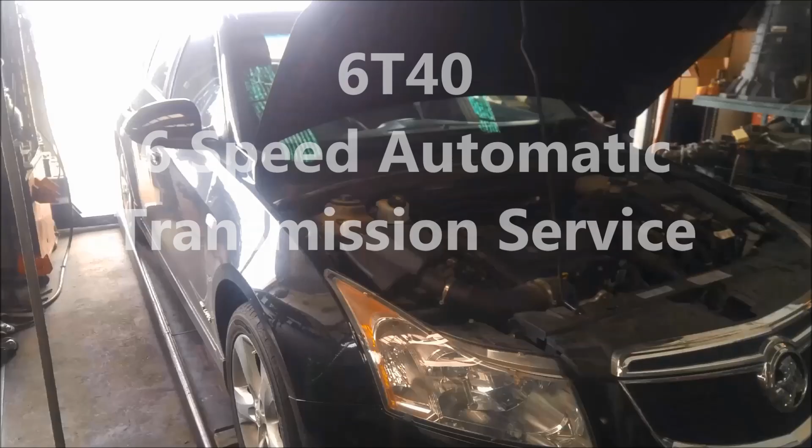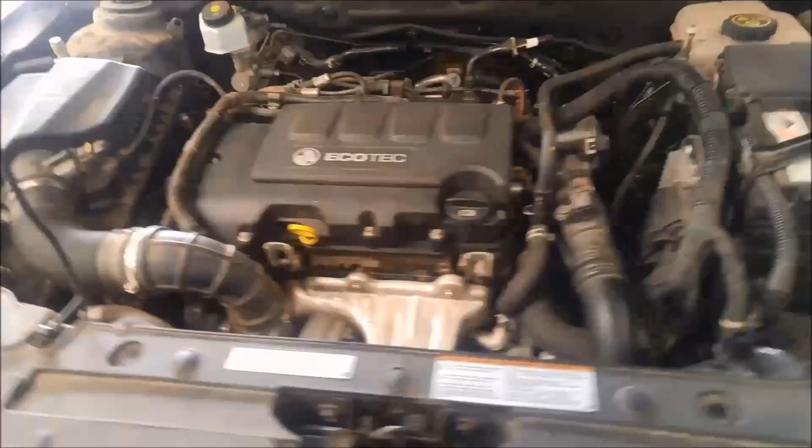G'day. Today we're doing a service on a Holden Cruze. It's the SRI, the 1.4 litre 6-speed auto, the 6T40.

Just to show you, filler plug. If you follow where this little breather is here, that's the breather for the transmission. There'll be a hose that runs down to a little plastic cap. That's where you actually fill the transmission. The oil level plug is just behind the left-hand axle there. I'll show you that in a moment. So I'll just give it a good blowout and clean around that filler plug.

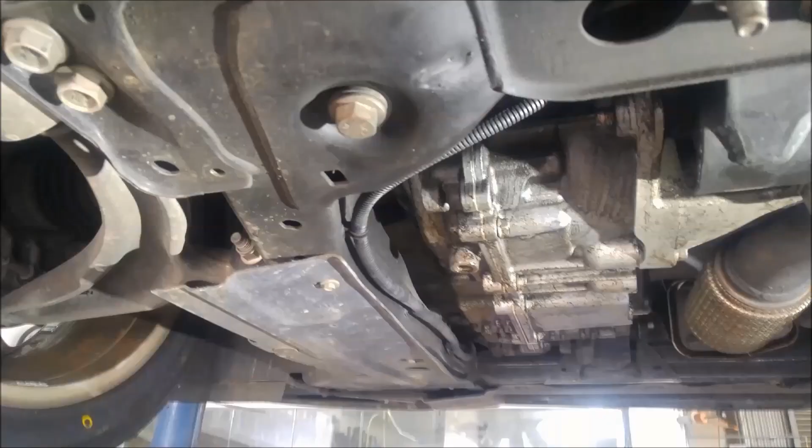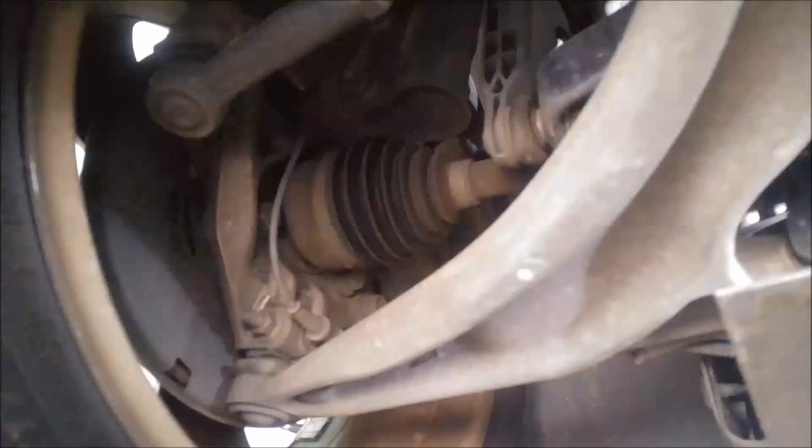Now, he's mentioned it's got hard downshifting, especially going around the corner. With these, there's a drain plug here. Good idea to always check the basics, like the CV joints, make sure they're not sloppy. Your engine mounts, because that can affect the harshness of going from drive to reverse as well.

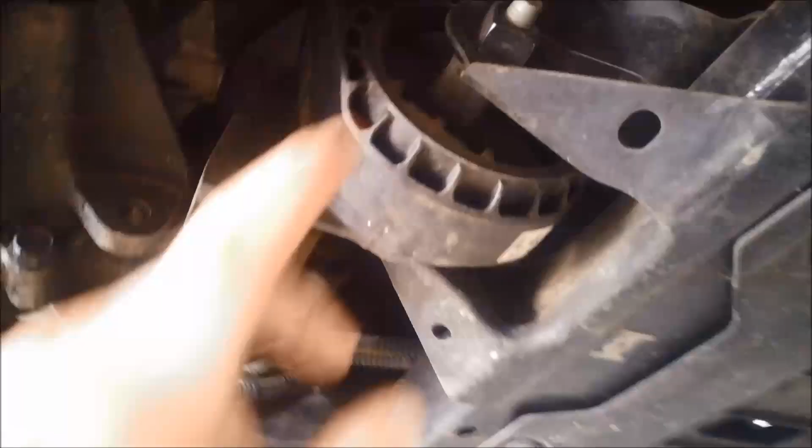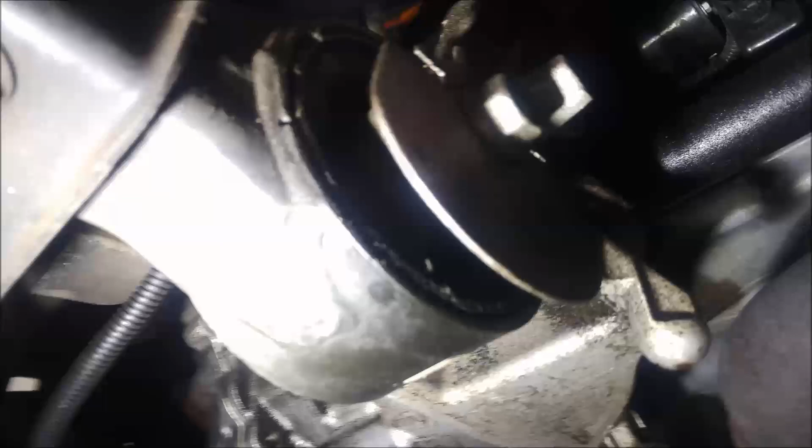So over here at the front, there's one that stops it from moving that way, and there's one at the back here as well. So quite often you'll see if they're perished, the rubber perishes if you've got an oil leak as well. That one looks alright, seems fairly central, same as the front one. And there's quite a few oil leaks all over the place. Seems to be leaking up higher there somewhere than that axle.

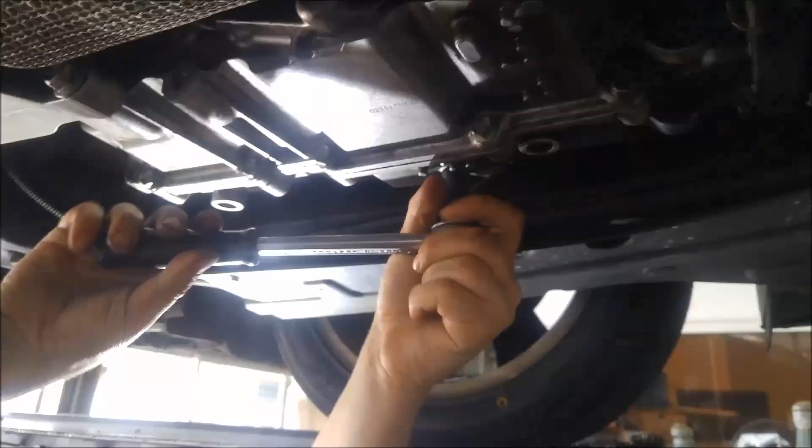I'll just give these a bit of a nip up. Sometimes that might take up a bit of that leak. They will loosen sometimes. And well, while it's in the vehicle, it's hard to get to them all. So I'll just give this a bit of a clean now and drop the oil out of it. Drain plug. Oh, it's pretty dirty.

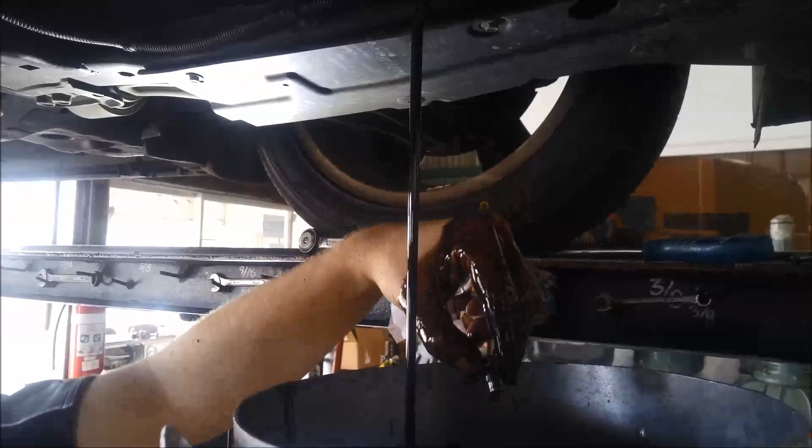That's drained out nicely. You can see probably about 3.5 litres have come out of it. So I'm just going to undo this plug here and just blow some air through that when this stops draining, and that'll force a little bit more of that dirty oil out.

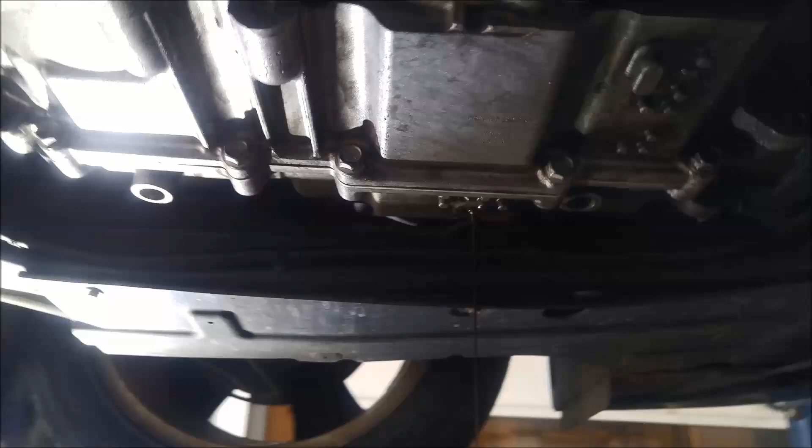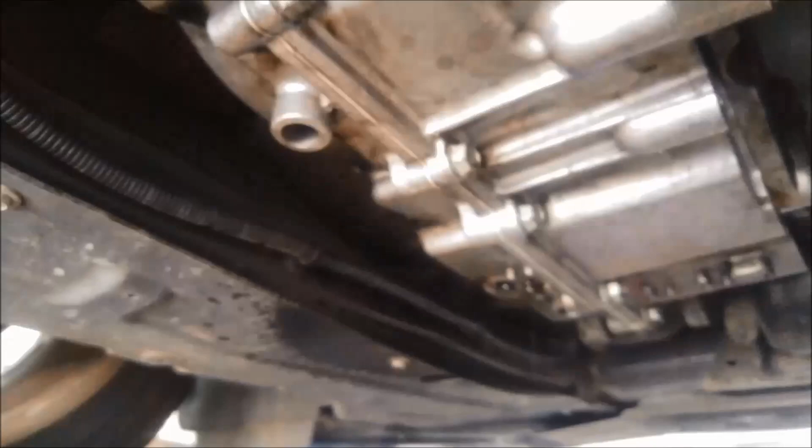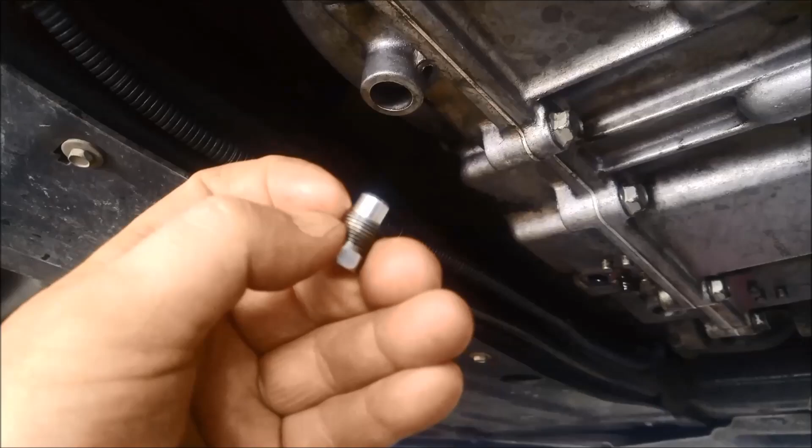Transmissions, they have an internal filter. You've got to pull the transmission apart to replace the filter. Some people put an inline filter on the cooling line. And another thing you can do, the drain plug, 10mm by 1mm pitch, you can put a magnet on there. Just make sure that the magnet's not hitting anything inside the transmission.

I think there is about an inch. You can poke a screwdriver in there and just see if there's anything there. And you don't want the magnet going too close to any spinning parts anyway. You don't want to magnetise anything. But if you put a short one in there, definitely beneficial.

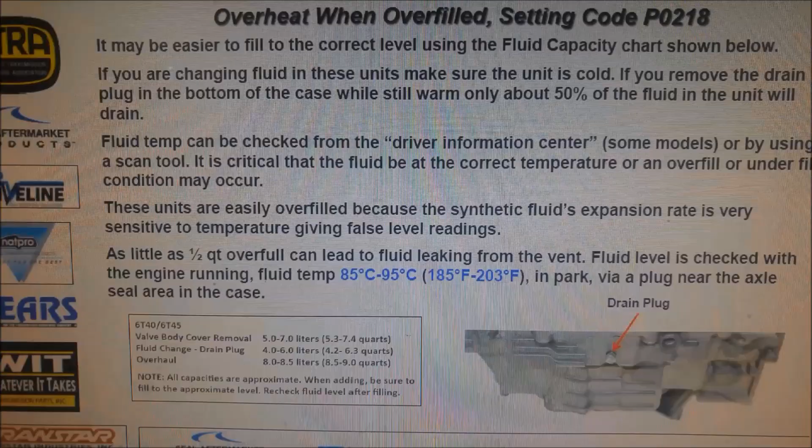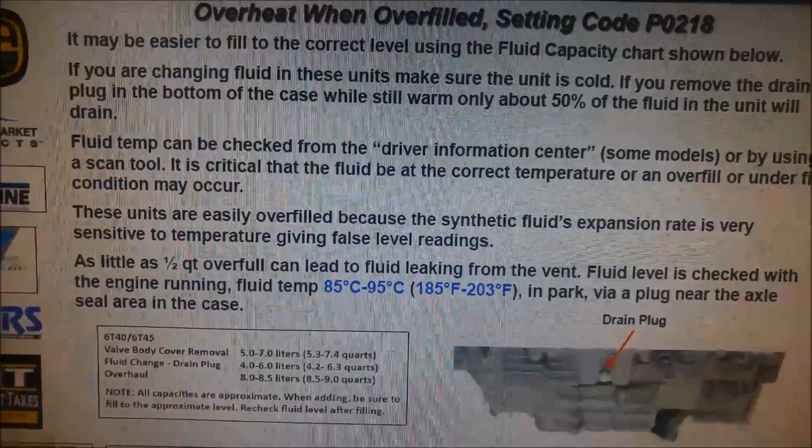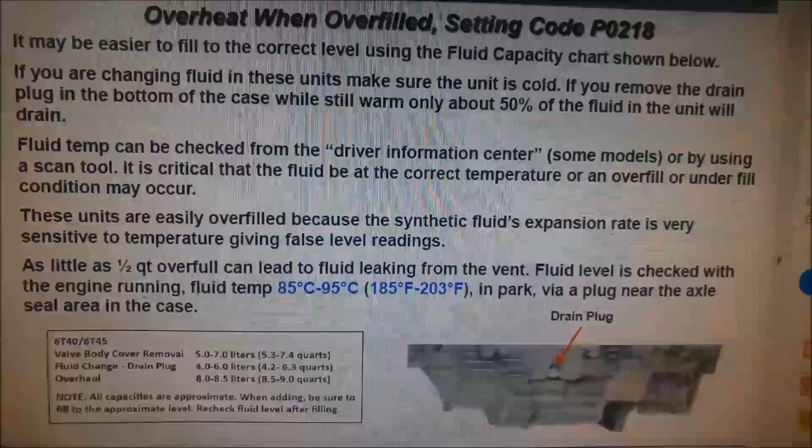And here I've got the ATRA bulletin. It shows that to get the correct oil level, you need to have the transmission between 85 and 95 degrees in park, and then you check your oil level. And it's very important not to overfill it, or you'll get fluid coming out of the breather.

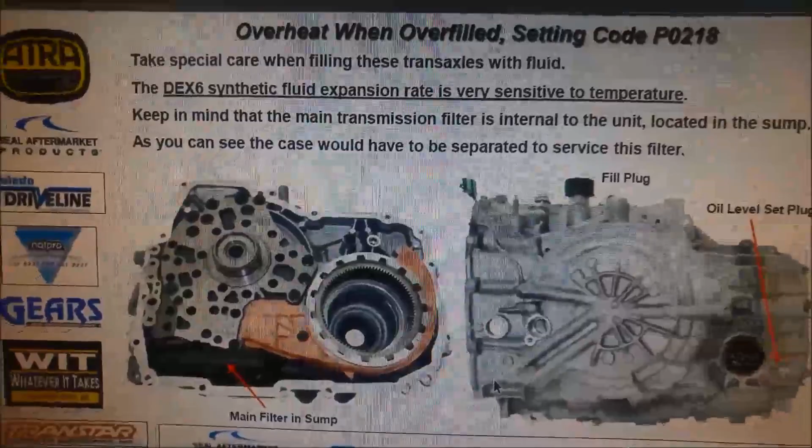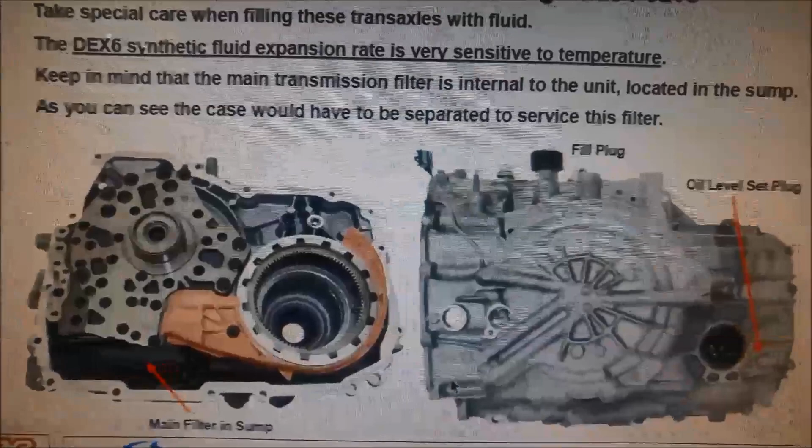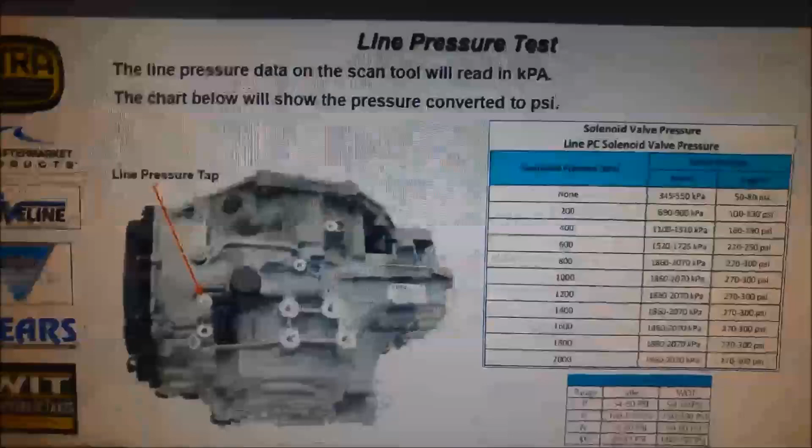And on the same bulletin there, you can see where the filter is. You've got to pull the transmission in half to actually replace that filter. That's why you can put an inline filter in there. And there's the oil level plug, just behind the left-hand axle. If you'd like to do a line pressure test, you can see where the little port is, just towards the front of the top of the transmission.

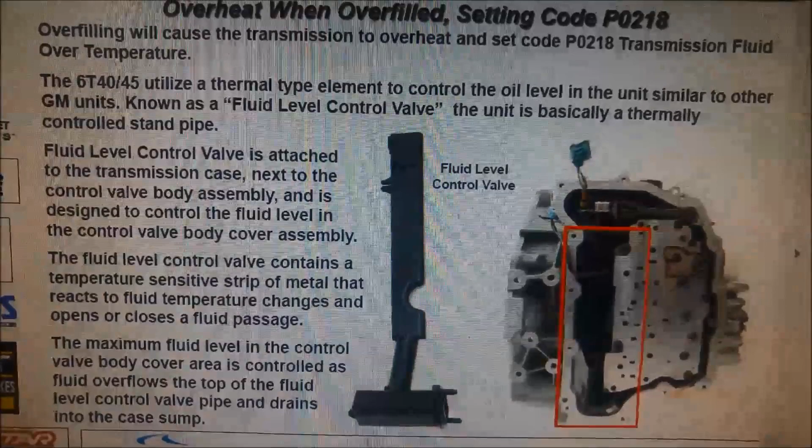And there's a little bit of information about the fluid level control valve and the reason why you need to warm it up between 85 and 95 degrees to get the correct fluid level.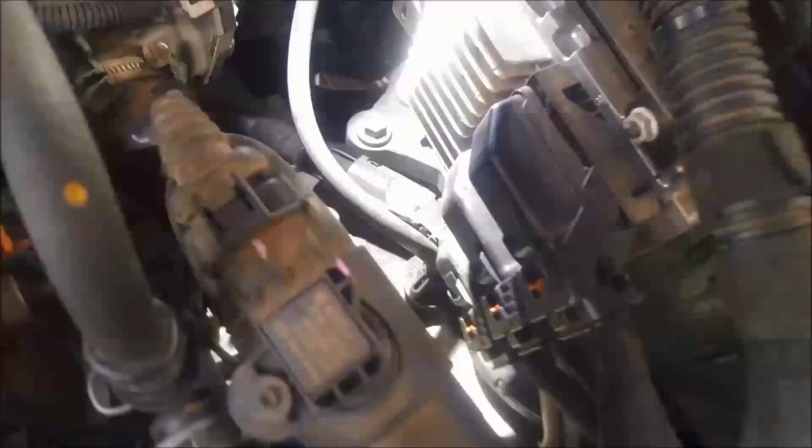Okay, we're just going to take that plug off. We just undo it. You can see under there. Pull that hose off. There we go. That's what the plug looks like. Little breather plug. Okay, I'll put about 4.5 litres in. We're on 43 degrees. We've got to get this up to about 85.

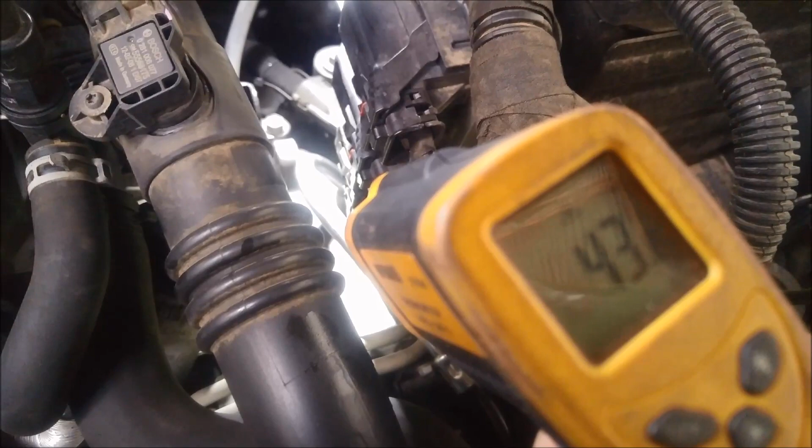Now, one way to warm it up a bit is to do a stall test. Basically, that involves putting your foot hard on the brake. We're in drive, and we're just going to see what the tacho revs up to. And that's going up to about 2450. Important not to do it for very long. Put it back in neutral. Let the oil circulate around. And it should be about the same in reverse.

We're in reverse now. Foot hard on the brake. Accelerator to the floor. And you can see that's gone up to about 2800 revs. So that tells us something in that oil circuit in reverse is slipping a bit.

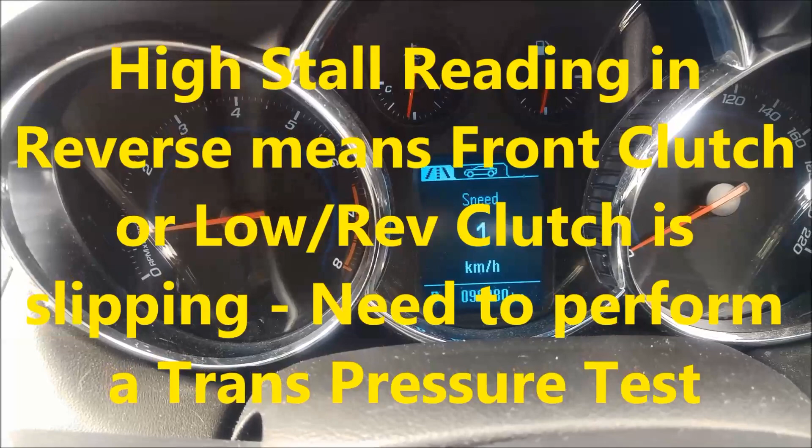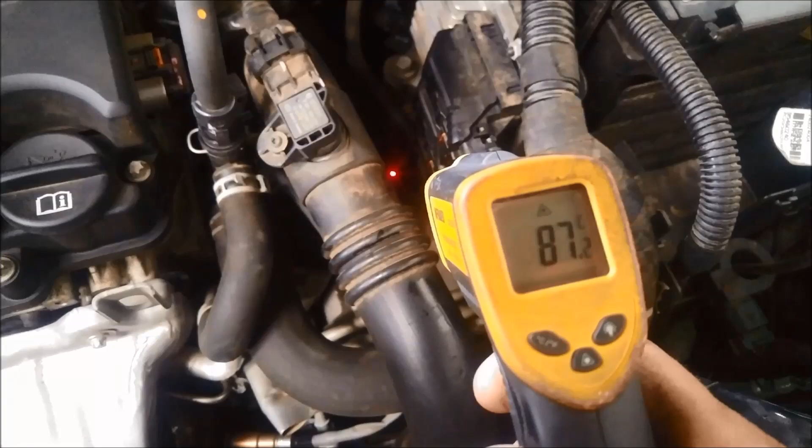We're on about 86 degrees, 87. And we'll just make sure that that oil's trickling out of that drain plug. A little bit too much. So when that just starts trickling, we'll put the plug back in and job's done.